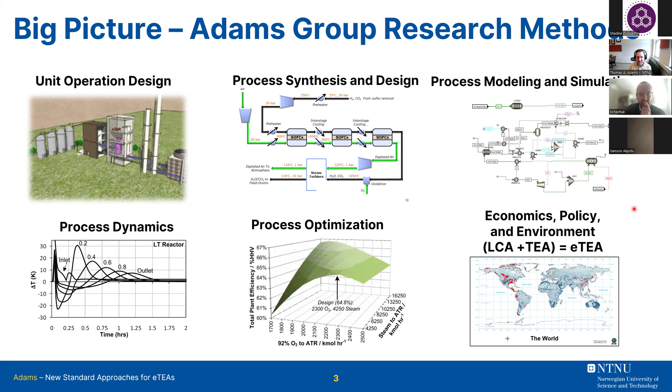So that's just the background of where my training is and what I do. Application wise, I've been all over the map. I'm not in a very particular technology, I'm more systems in general. A better way to look at what I do is taking technology ideas that might be at TRL 1, 2, 3, and then seeing how they would be commercialized, working at like 8, 9 or 10, depending on what TRL scale you're using, so at the full commercial side.

And so the areas, I'm all over the map, I'm very neutral. Very often I have collaborators from industry and academia with different ideas - new catalyst, new piece of equipment, new process idea, new concept, new supply chain. And so we very often work with them to value that technology - what is its value on the eco-technoeconomic analysis sort of side of things?

The big picture question I'm trying to answer at the end of the day is, how do we spend the next $1 trillion to fight climate change? So it's, where do we put our money?

Excuse me. Okay, see how this is going to go today.

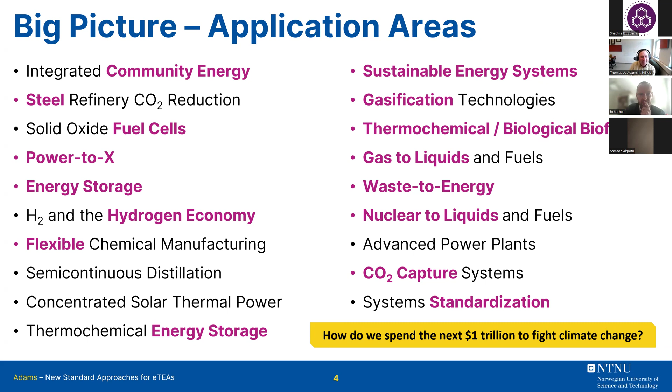Okay, so I think a lot of you might be familiar with the concept of ETEA. If you're not, we'll talk about that. We also need to talk about why we need standards.

One of the things - I think you're familiar with an LCA, you're familiar with a TEA, it's really just the two put together. So the eco part is the environmental impacts part. The techno part is the materials, energy flows, efficiencies, how it's actually working. And then the economic part, I think that's very easy to understand - it's not just cost, but it's profitability, it's business case, it's uncertainty, it's risk.

And that's very important in the economics, because risk is a huge part of it. And interest rate on the loan, debt to equity ratio, that often has more of an impact than the technology itself and the profitability of a technology proposal. So we really need to be informed, and we really need to factor in all of these different areas. And combining that, we get the ETEA.

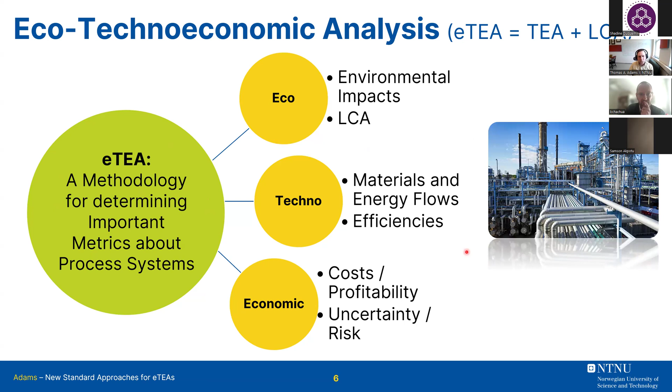And in my line of research and in my collaborations and my consulting, I've worked with a number of different groups, and you might come from all these different sectors. I think industry is a real obvious one, because you're looking at technology selection decisions, go/no-go decisions, day-to-day process design decisions, if you're making a plan or making operational decisions. At the end of the day, it's a really obvious one.

But one that's less obvious is in capital finance, and this is becoming more and more important as we get into the realm of green financing. So if you're investing, you might loan $1 billion towards some large capital project, and there's a green aspect to it, with the environmental - maybe it's just CO2 emissions, or it's specifically a higher risk green technology. It's really important to have that ETEA in place so you can value the environmental benefit, which especially in green finance means you might accept a higher risk project that you wouldn't otherwise, just because of the potential environmental benefits that are accounted for.

Funding agencies are another one. This is one of the first groups to start this, because we're looking at assessment of merit of a proposal. Okay, so you want to invest in CO2 capture research - what are the technologies? Where should my research funding go? Because I'm going to get sort of an eco return on that funding. So it's really important to have these cross-cutting comparisons. You'll see in Alberta, Canada, for example, so that's the energy producing province primarily in Canada.

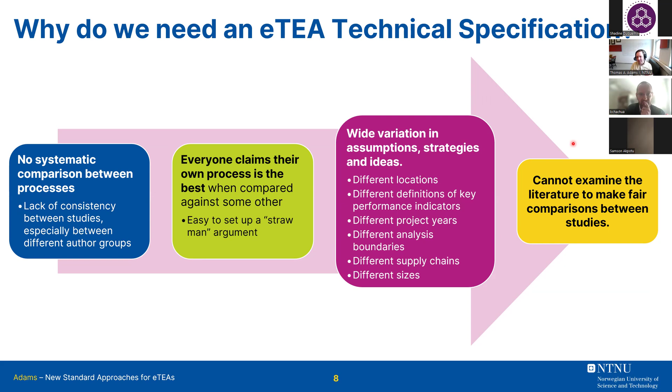This happens because we have lots of variation in how we do things, the strategies, methods, and ideas. My idea versus your idea really matters based on location. My idea might be fine in one place, yours might be fine in another. How we define things like efficiency, key performance indicators, lots of things go into the analysis that turn out to have a huge impact on the bottom line. At the end of the day, there's so much noise that you get no signal out of it. You can't make any really good comparisons in the literature between things. So this was the original problem: understanding differences between things and making decisions.

So here's a simple example. We took surveys of ETEAs in the literature for, in this case, power plants with carbon capture. I've taken three here: classic coal, coal with oxyfuels, and coal with gasification combined cycle. So three strategies of making power with coal, all with carbon capture and sequestration, meant to be like a reduced-impact coal.

44 studies in the literature, taking the numbers as reported directly. In this case we're looking at cost of CO2 avoided — I'll talk more about that as well. Cost of CO2 avoided is basically the extra money you spend to be green, say euros per ton of CO2 avoided by doing the green thing. You want that number to be as low as possible if you're investing in green technology for the purpose of avoiding emissions.

But just as reported in the literature, all the different technologies basically average out within statistically insignificant differences, in terms of error bars and things like this. So you can't look at the literature and make any meaningful conclusions between them.

But if I just take the same exact technical information and standardize on things like size, supply chain, location, and year, without changing anything about how they did the cost...

I don't change anything about the technology itself, but we actually get a very different picture once we standardize. And in fact, it's very different. So they're all statistically significant, meaning they're outside of error bars here. This one's really significant, and now we have useful information that we couldn't see clearly.

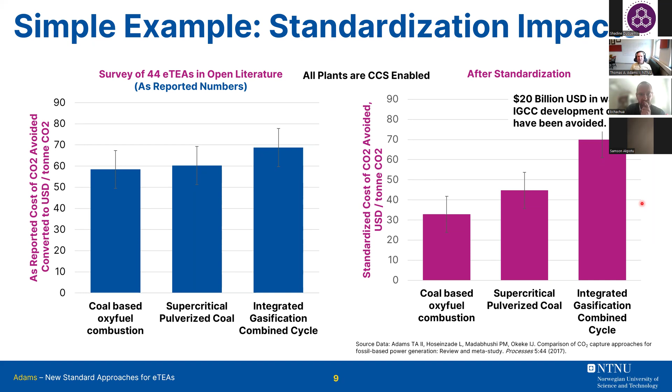So these are some really good examples of why we need it, and you can kind of drill down the details.

Here's another example. Let's say I have two power plants of that type at different sizes. Their cost of electricity is about 6% different just from the size - 550 to one that's half the size. But if I have two different plants at the same size, using that same kind of analysis, but standardized and the same size, their cost difference might be the same percentage. So in this example, the effect of size has as much signal as the actual technology itself.

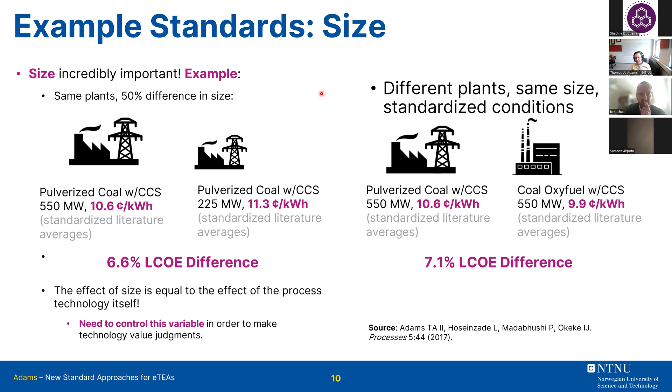So if we're not even able to make comparisons on size, if everyone just does whatever they like when we're trying to make technology assessments, we're just blending out the real signal. This is a signal - I have a real piece of information here, and this is noise. So we need to blend that out, we need to get rid of that.

But the problem is we do this all the time. The reason I'm using this example is because at least in the power plant world, it's very common to do a study where I look at my power plant without capture and my power plant with carbon capture, and that plant is smaller in total net power because they take the same plant and add a CO2 capture section. There's a huge parasitic load and the net power is a lot smaller. Let's say I go from 750 megawatts down to 500 net power because I have 250 megawatts of parasitic load in my CO2 capture.

These are standardized on the same fuel input, but this is just a really simple question of: I want 750 megawatts of power, I don't want 500 megawatts. I still need 750 megawatts of power. So unfortunately, we do this all the time in the literature - we have the same fuel input, and it tends to be for convenience.

But the LCA people don't have this problem. They use the concept of functional unit, and I get the sense there's probably a lot of LCA people in the audience. These are really based on outputs and outcomes - based on outputs and outcomes. Okay, and so that's been recognized.

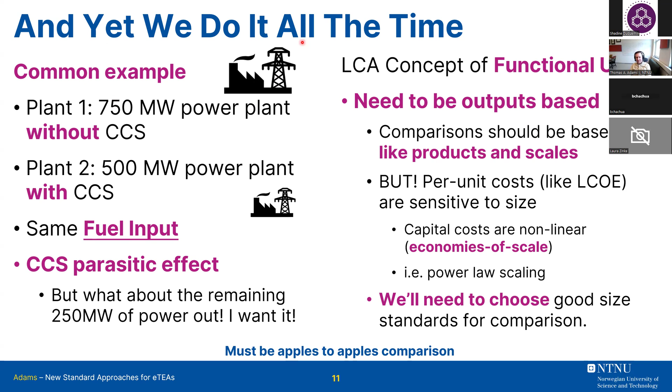But our per-unit costs are sensitive to size. When I talk about cost, size really, really matters because they're nonlinear - the economies of scale are a huge factor. So when it came to ETEAs, when this started being developed, it was the sense of we need to take this kind of functional unit concept applied to the LCA and apply it also to the TEA. That's really one of the major development points.

So let me give you an example of when we do this now - a little bit more of that power plant study. In this case, we looked at over 100 different studies that had some kind of published ETEA report on a power plant with carbon capture. We took all that information and rescaled it to the same net power output, leaving the gate, so we have to adjust cost based on size. We did it all at the same time and place - that's something that's not common either.

So we picked 2016 in this study - it's a little bit older - and we looked at the location in North America. So if you had a plant for Germany, a plant for the UK, we could adjust its location with the purchasing power parity index, to determine what it would cost to build that same plant in the United States.

We then took the same supply chains for fuel, so the same life cycle impacts, the same costs. We looked at the CO2 capture, which needed to be at the same pipeline conditions, the same capture rate, the same purities and pressures. We took the same life cycle assessment methodologies, the same standards for things like NOx and other chemicals and emissions along that entire life cycle. We can use that to compute things like cost of CO2 avoided with the same baselines. So we took the same information in the literature and standardized it.

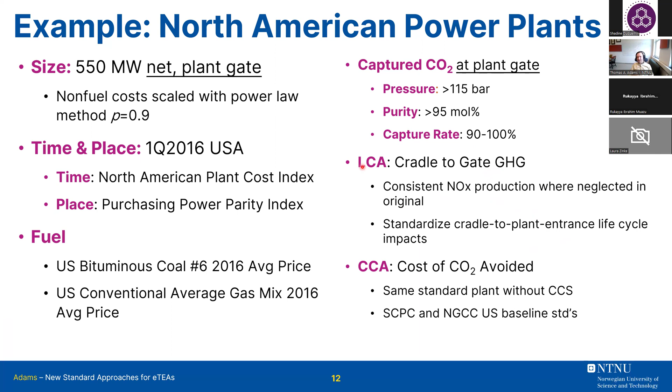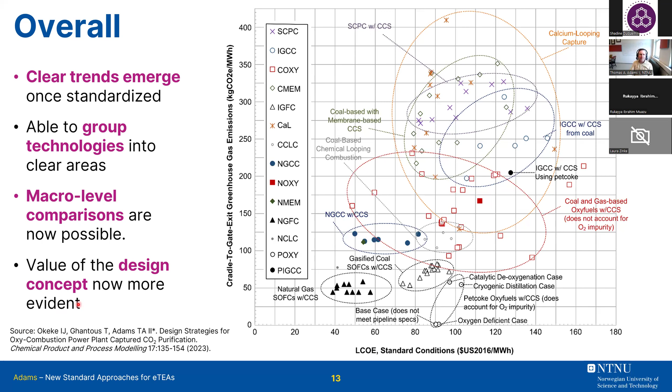Sorry about that. So that's where this was born, where the standard movement was born. It started out of this kind of stuff.

All right, you're doing great. We'll get through this.

Okay, so it really started in the beginning. The DOE, U.S. Department of Energy, started building internal standards for their own TEAs, and they recognized this noise problem. So they started publishing documents in 2015, basically saying everyone that does a study at the DOE should have this exact assumption. It was a good start, and that actually laid the groundwork for a lot of the standards developed later.

So the stuff I just showed you was from our group in 2017, but working completely independently and unaware of each other was a group of universities in the US and the EU that were also proposing an ETEA standard methodology and developing the principles. I think their biggest contribution that really stuck is connecting the LCA 14040, 14044 functional unit thinking directly to the TEA, and that's what's made it into the 14076 that's coming forward. So this was done independently, at the same time.

Then these people all got together at a conference at FOCAPD 2019, and we put together a formal call to develop the standard. That's really when it went into play, and we've been developing this since 2019. There's been some other groups looking at these same issues, but the point is that we all, even working independently, came to the same conclusion that we really needed a standard like this, to get rid of that noise and talk to each other on the same basis. And so that's where the 14076 progress has been made.

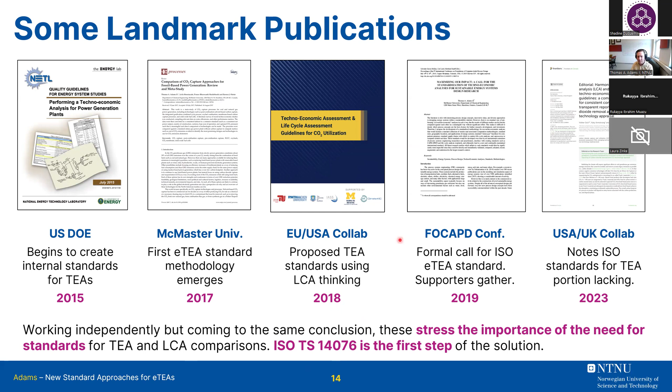In addition to the 12 countries that have sent 26 working group experts to develop it, we have a large number of supporters outside of the ISO, from academia, industry, and government. These are all people who have written letters to champion the cause and indicate the need for this kind of study. So we're not operating in a vacuum. Many of them have actually sent members to the ISO or informed their own local bodies about it.

Okay, so the draft itself of the text, I can't tell you until it's released. I can tell you about the strategy and some of the key points relevant for this discussion. So here's our big picture view for how it's going to go. The 14076 is called Principles, Requirements, and Guidelines. It's basically how to conduct an ETEA in a general sense, so best practices but also requirements. So it has something called a shall clause. A shall clause means if you're going to do an ETEA that meets the standard, you have to do these things, and if you don't do one of them, it doesn't meet the standard. That's just how standards work.

Now, this is really about the methodology, not about numbers or specifics. So a person doing the ETEA would use this methodology, but we do not tell you, okay, your power plant has to be at 550 megawatts to do your study. It's not like that. You pick your own assumptions, but the idea is, if we're all going to be talking to each other for general technology evaluation and comparison, you should be picking parameters that are well defined that other people can also pick.

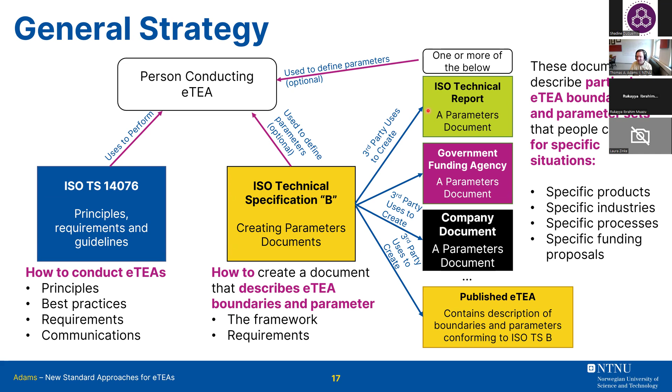Okay, and this is where we are right now. So I'll repeat again, we do not tell you any particular choice of assumptions and parameters. It's really about communication and the methods. So the draft has been written, but it's still confidential because it's not approved yet.

We went through a public consultation period, and now it is circulating among the member countries for formal comment. There are 30-something on the full committee, and they can each have their own internal evaluation.

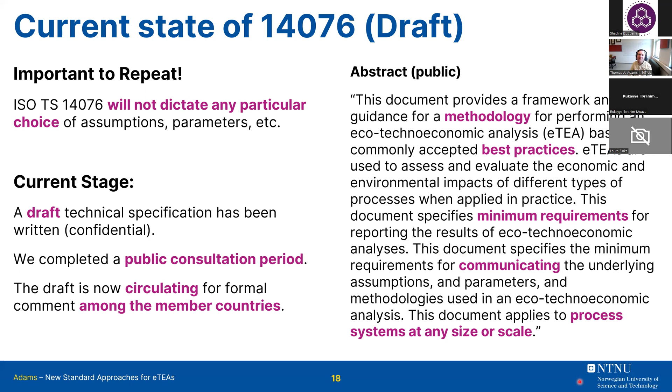But I can give you the abstract. I'm not going to read it, but basically it's about the methodology, it's about best practices, it's about the minimum requirements that you have to do to make it meet the standard. It's about communication, that's really important. And it can work for really any process system at any size or scale. So it's very general, not for a particular application.

I think I'm going to skip the general structure for the sake of time, but the key point is that we need to introduce definitions. We need to worry about the framework and the methods and the requirements. We have some illustrations and examples.

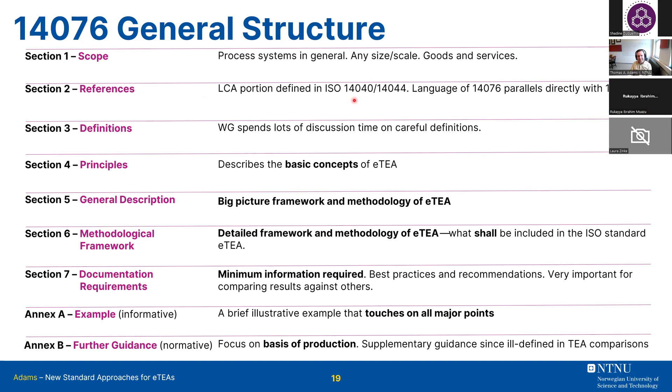And also, just for LCA people, the LCA part of the 14076 is really just 14040, 14044. So that language comes directly from there, and sometimes it just refers to it exactly. So if you're familiar already with an ISO LCA standard, this is going to just be the extension really to TEA. That's really what's happening for those of you familiar with that side of it.

I can explain the basic concepts in, I think, 2 images for how this is going to work. We have our LCA and our TEA, and in any methodology like this, it's very iterative. You kind of move and make decisions around different sections. So you have your goal and scope, just like your ISO 14040 stuff, but now it includes TEA in that goal and scope.

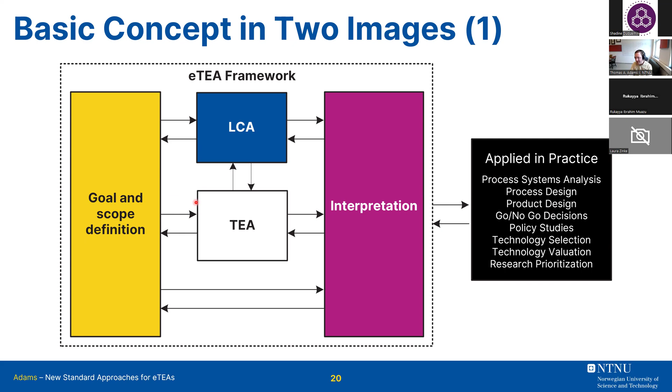And of course, you're going to be reinterpreting and changing things as you go. You could use it, apply it, go back and make more changes and so forth. It just shows you it's kind of an iterative, fluid process that's to meet the needs of your own analysis. But I think the really new thing is this image here.

So the LCA community will be very familiar with a diagram like this, where I have a product system boundary to conduct a life cycle assessment. Within a product system boundary, this is normally or ideally like a cradle to grave boundary. Inside the boundary are all the different processes in a supply chain, including the raw materials production, use of energy, making a product, including the factory construction, its end of life, the use of the product, and then the waste handling.

It's very normal to look at this with an LCA, and if it's cradle to grave, you really only have elementary flows coming in and out. An elementary flow is just something that comes to or from the environment. So I might be pulling iron ore out of the ground, or raw natural gas out of the ground, and then my flows back to the environment might be carbon dioxide emissions and polluted water and things like this. This is my interaction with the environment.

But what's new here is what we had to name the business unit boundary. This is the techno-economic analysis boundary. I think a lot of people do TEAs without ever using the word boundary or ever defining it, but implicitly it almost always means the costs to me or the costs to my company. So it's 2 different perspectives.

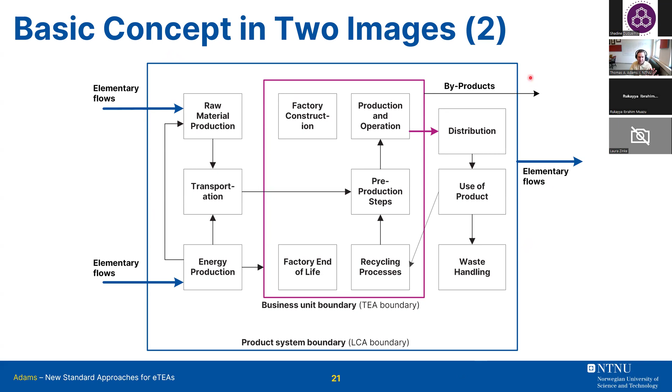We have the life cycle perspective from the whole supply chain of what we're doing, but we're only acting within a limited sphere of influence, and we only worry about costs within our own limited sphere of influence. So we really have to recognize 2 very different ways of thinking and doing the analysis when you put these 2 together. This is the trickiest part. I think this is the hardest for LCA people to understand the TEA boundary, and for TEA people, sometimes they have to also learn to understand the full supply chain as well. So both communities have to kind of bridge this gap to understand how putting the 2 together is going to work.

So the products, this is the same thing I basically just said. The product system boundary is environmental. One way to think about the business unit boundary, it's really the techno-economic boundary, but it's really the business unit. It's the areas of the supply chain that I can directly control, not indirectly control. Like I can control how I make my product. I cannot control how, when I purchase a material, how that supplier made that material, not in any direct sense. So I'm concerned about my cost, my company bottom line, or my consumer issues.

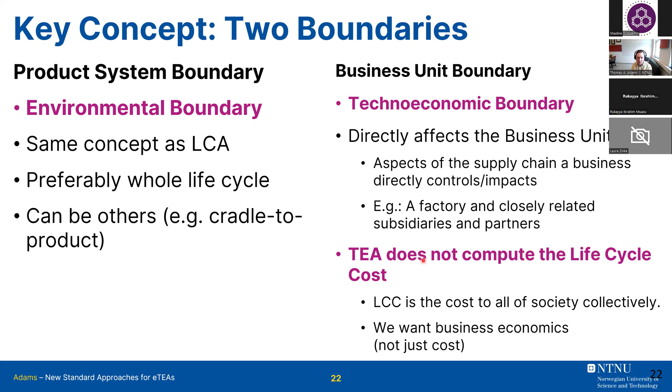Okay, and this is really key because this is not a life cycle cost. A life cycle cost would involve the whole society. This is the business unit only, and that's really, really key. We need this because of that sphere of influence.

This makes a lot of sense because what I'm really interested in is how this technology is going to grow in a free market setting. We have to recognize that each business unit is going to act in its own self-interest. It doesn't mean selfishness, it just means whether it's a person or a company, they're going to do what's best for them.

They have ethics and morals and things like this, but we codify this in law as fiduciary duty if it's a publicly held company, for example. So this is just a normal way of understanding how businesses and individuals can work.

But we have to recognize that the individual decisions I make affect the entire supply chain from the environmental perspective. So we really need that. We have to connect the local business economic interests with the global environmental impacts. At the end of the day, that's the ideal situation.

If I'm going to give you a green technology, I have some new technology idea, I think it's really good, I want to develop it. The best case I can make is one where every business unit along the supply chain has a good case. If there's a good case for units 1, 2, and 4, but the third company involved, it's destroying their business model, this probably won't take off as a technology.

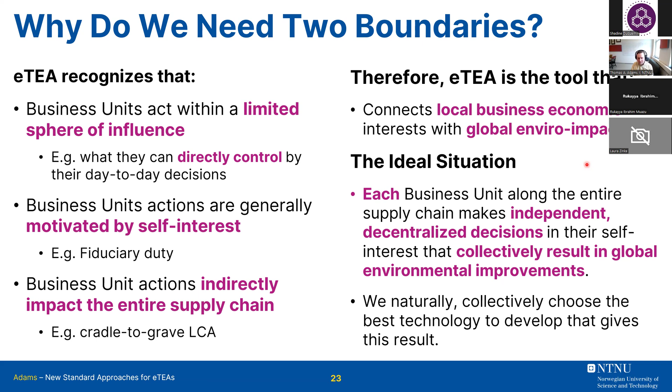At least not without a lot of major changes. So what we want to do is come up with a technology where each company, each business unit or person, naturally chooses it. They choose it because it's a good idea for themselves, but for the whole society we have a collective global environmental improvement. That's what we want. If these technologies are naturally adopted, we can have real change without command forcing. That's what we want, and that's really how the ETEA helps us do that.

But it's tricky because we have to understand scale, and this is a departure from the LCA side. In the LCA world, they have a concept called a functional unit, and we have the same concept here. The functional unit is, I'm not going to get into all the details, but essentially you think about the purpose of what you're doing in a per unit sense - like per kilogram of the product I consume, per kilometer that I drive something, per hour I perform a service, or a service has been performed, whatever.

The idea is that the environmental impacts are basically linear. If I have double the use of my product, I will double the life cycle impacts. It's not always true, but most LCAs have this assumption completely built in, and a functional unit almost requires this by definition. But economics are nonlinear, so scale really matters.

So we have to have a new term called the basis of production. The definition will still have to be approved because it's still in the draft stage, but you can think of it as the expression of the functional unit at scale. So my functional unit might be CO2 emissions per kilowatt hour of electricity, but at scale, my basis of production might be: my power plant is 250 megawatts net power, always running for 30 years. So it's how do you achieve your functional unit at scale.

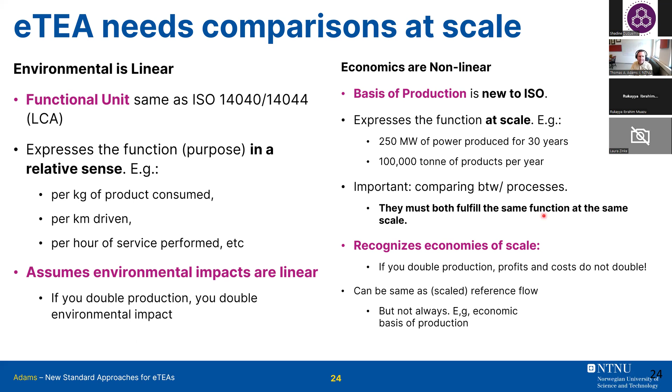Your scale could be defined like this, or it could also be defined economically - I don't want to get into that detail, but you can have scales that are things like $1 billion of investment, that's my scale. That can happen, but we don't need to worry about that so much. You have to do this because when you're comparing processes, they have to fulfill those same functions. That's one of the key things that had to be worked out in the new standard, and I think that's the most new thing.

But the whole point is, if we can do this, then now we have a standardized decision tool to evaluate these impacts, different solutions when applied in practice. Then we can all speak the same language. So that's the point.

So let me give you a couple examples to put things in perspective, beyond the motivating ones I showed earlier. I'm going to go back to cost of CO2 avoided. I use it because it's probably the most well-known ETEA metric - you have to do the ETEA to get it.

Basically, you might hear things like cost of CO2 abated, mitigated, or avoided. They're all going to have some nuances and arguments about how to define them, but a very general way to think about it is some extra cost you spend to do a green thing that you wouldn't normally do, divided by the emissions you avoid by doing that.

Okay, so for biofuels, for example, let's say I'm going to use biofuels instead of petrodiesel or petrogasoline. So I have my cost of the biofuels minus my cost of the petros, and this should usually be higher.

And to be more specific, I'm usually concerned about the cost to the business unit. So if I'm the customer, I'm concerned about my own cost, not necessarily societal cost. So what are my personal costs when I go to the station and choose what fuel to put in my car? That's my business unit, there is me, and what are my costs? Then compare that to business as usual, which is my cost if I bought the diesel.

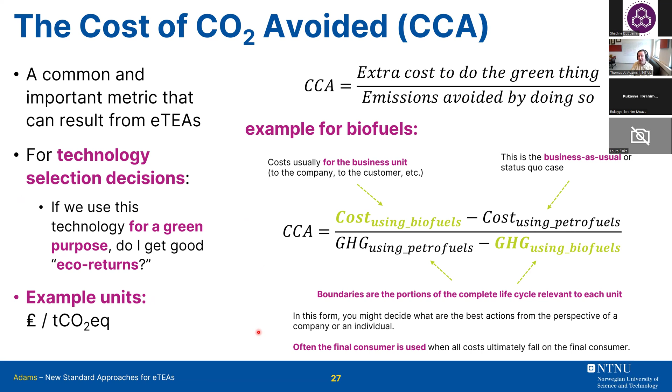Example units might be pounds per ton of CO2 avoided. So it's 50 British pounds per ton of CO2 avoided. That's a really nice low number — that would be a good technology choice. So we're looking at eco returns on my money. If I'm going to do this green thing, what kind of eco return do I get? I want that number to be low.

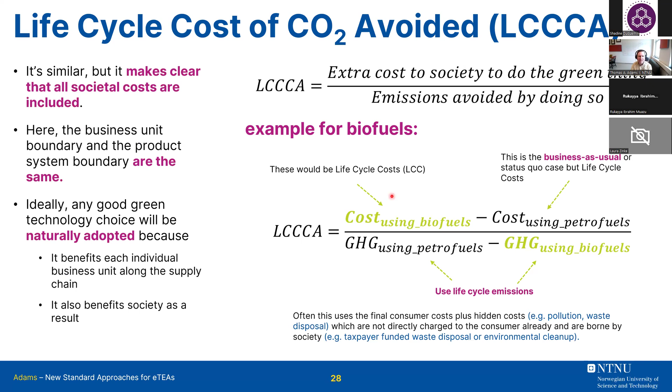Related to that, you can have a life cycle cost of CO2 avoided. It's basically the same thing, except now you're looking at the full society cost, not just one of the business units — very similar. And all this information can come from an LCA at some level.

Okay, so let's say I just have some process. I'm going to produce some product and it's going to be used for some purpose — maybe it's driving my car. So in this supply chain, I have many different business units involved. I might start from raw materials production, transport it, and a different company would then convert that to something, a product purchased by the consumer.

And then there's some additional waste — this could be known waste treatment, but it can also be hidden costs in society too, which are kind of fuzzy. But the point is that there's more downstream. This green box is the environmental boundary, the product system boundary, and we have emissions and materials coming in and out of that boundary.

Now, costs are always passed down to the consumer, really passed downhill — that's just something to keep in mind. But when you use a metric like this, we can use a cost of CO2 avoided at each business unit. So I could have a cost of CO2 avoided for business unit 1: what are their extra costs involved in this green technology change I'm thinking about?

Okay, maybe it's like nothing — maybe they don't change anything, so it's fine, they don't care. Or maybe it's something, wow, they've got to clean up their product a little bit more, meet a different product purity specification or whatever it might be. And I might have one for this, and the denominator is going to be the greenhouse gas, the portions of that life cycle for which they are responsible.

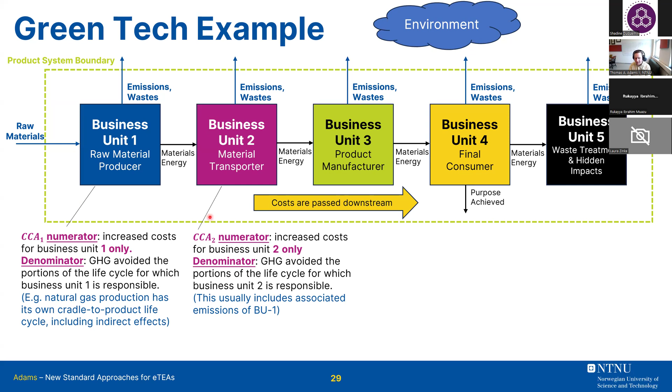And I might do it again for number 2 — the same thing, their business unit boundary is just this box, their own costs, but their denominator is actually what they're responsible for, which is going to be more business unit 1 and 2, and maybe some other things too. And we can go down the line and compute one of these for all of them, for unit 4, the customer.

Very often we just use that when we make a decision — well, what's the final customer CCA? And that's thinking a little too shallow. It's a good one to use, especially because you can incorporate things like wastewater treatment, disposal fees, and emissions fees into that and pass that cost back to the customer. But it's a little incomplete, okay?

You could do one for the fifth one, which is everything else. That's not the same as life cycle cost of CO2 avoided, because that would be the full society cost divided by the full emissions, okay, on the whole boundary.

So that's something to think about. But if the technology is good, if it will work on its own, then all of these CCAs should be small, and the life cycle - that's what we want. That's the golden goose, right?

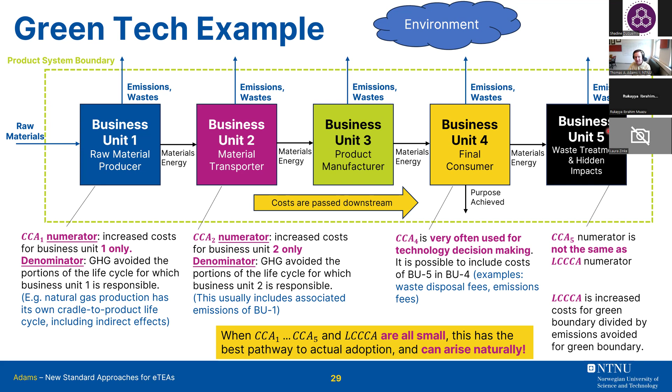It's not enough to be just one, because we have to be concerned about everything. But if we can get all of them low naturally, then these are the technologies that are most promising, that will be adopted on a free market without coercion, or maybe a small carbon tax - you might need those kinds of incentives. We want these to be small, and we have to be thinking because these are individual self-interested people. That's where 14076, I think, is the most important, because it really breaks it down into all the pieces and all the things that we really need at the end of the day.

I'm going to leave it with maybe one more quick example, but with real numbers: should I electrify heat? This is a really hot topic in the EU system - they have a lot of funding available for answering that question. Should I switch from burning a fuel to using electricity to heat stuff? It could be your house, it could be extremely high temperature chemical reactors. We can look at that answer in a rough sense by looking at the CO2 emissions of different power sources.

These would be cradle to product. I collected a whole bunch here from different sources, and these are some rough averages for things like coal power - the countries have actually pretty well-known data. Modern natural gas is here. World average is here at 438 grams of CO2 per kilowatt hour. Germany, US, coal with carbon capture is here, UK coming in just a little below that. We have some of the blue ones - these are all carbon capture technologies with fossil.

Canada, we're getting pretty low here, just about the same as solar with batteries. Natural gas combined cycle with CCS even lower than solar with batteries, so think about that. And then we get down to, think, Norway is lowest in the world - it's because it's almost all hydroelectric, which is the very bottom end of the spectrum. So it's huge, orders of magnitude 2 between the top and the bottom end. That's our data, because it depends on the source.

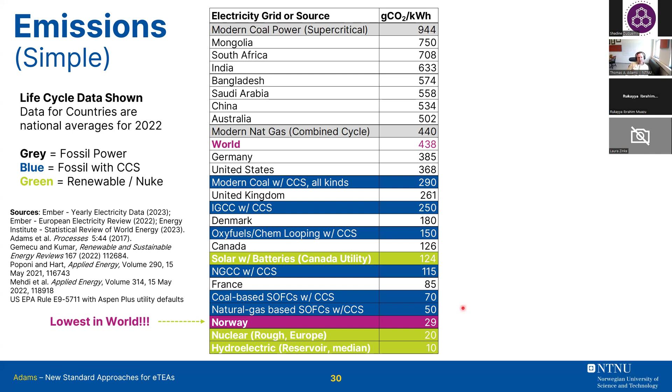So let me ask the question more specifically: should I do it in Norway? Because I'm sitting here in Norway, and I'm going to answer the question for Norway. What I've got here is some other data - the cost of utilities as a function of their temperature. These are sort of average dollar per gigajoule of service for different average chemical plant utilities. We have refrigeration, different kinds of steam. For medium pressure steam, it's about $6 per gigajoule of heat as provided by condensing steam - that's about 180 Celsius or something.

And I can look at the price of electricity in Norway - it's about $32 per gigajoule. That's the average price for last quarter that I have data for. And then if I was to produce steam from natural gas, I have some emissions versus steam from electricity. I can come up with these numbers through various ways. I can compute the CCA pretty simply - I'm just going to do unit conversion here from dollars per gigajoule to dollars per megawatt hour.

And now I can compute my CO2 emissions. So this is my higher cost of electricity minus my lower cost, over my higher emissions of steam - this is my emissions minus the emissions of electricity-based steam, which is very low. It's about $470 per ton, and that's at the medium pressure level. Just to give you some other numbers, this is 100% efficiency direct heating. If I used a heat pump, I can probably bring it down to 160 to 240, but I could go lower in temperature - so lower pressure steam is lower cost than higher pressure steam. So I have some numbers.

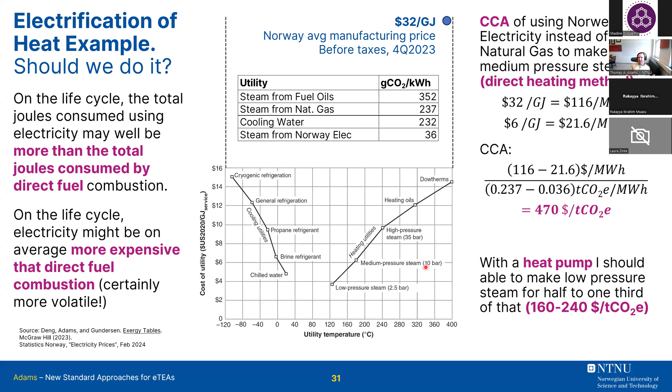Okay, so for Norway, well, we don't have any coal plants to knock down, and biofuels aren't ready yet. So it's not terrible, but I wouldn't do this in the US. We have a lot of other options here, especially that we can do. So it really depends on where you are, but now we have a really good perspective on things that we can do, and that's what I want to be able to do with the ETEAs.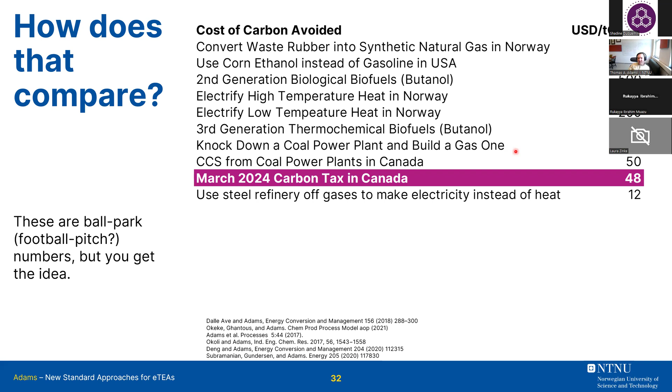I'm gonna stop it there. I think for the sake of time, I just wanted to say we're working on doing the same things for hydrogen as well. These are not standardized, so that's what we're doing right now. We're trying to give you the same kind of information for the hydrogen economy. It's a big undertaking, so that's what our active role is right now.

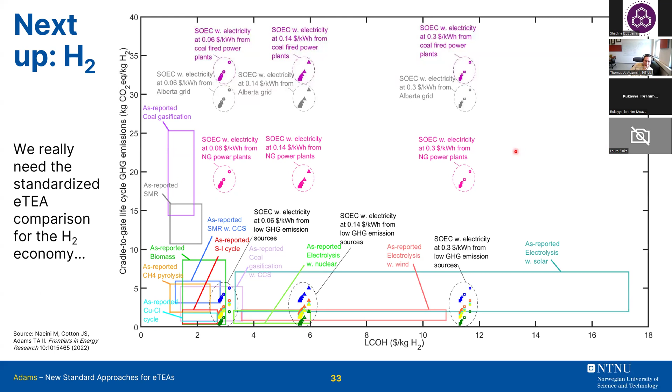Okay, and I'm just going to skip right to the end. My main selling point is, this standard, we think we can help across the board with academia, with industry, with finance. The main thing I want you all to do is talk to each other better so that we can learn from each other. That's the motivating factor. And that's so hard to say, and actually so hard to actually do. I can say it, but it is so hard for me to look at your papers and your work and to compare it to mine and to compare it to each other. But if we can just speak the same language, our value together is magnified greatly. All right, thank you very much.

Well, thanks very much, Tom, for your presentation. A lot of the things you're saying is also music to my ears. It's really nice to hear, and I think you're making a great point for using eTEA in general for guiding research and development and policy. I can also see that it's really relevant when you're trying to reuse some published results in your own assessment without having to redo everything yourself to get consistency, and I think that's another benefit. The effect of scale that you're mentioning is something we see throughout. In some of our recent assessments, LCA, the functional unit might be, say, 1 ton of ethylene, but for a plant producing 100 kilotons per annum. So your standard is going to bring that together very nicely, I believe.